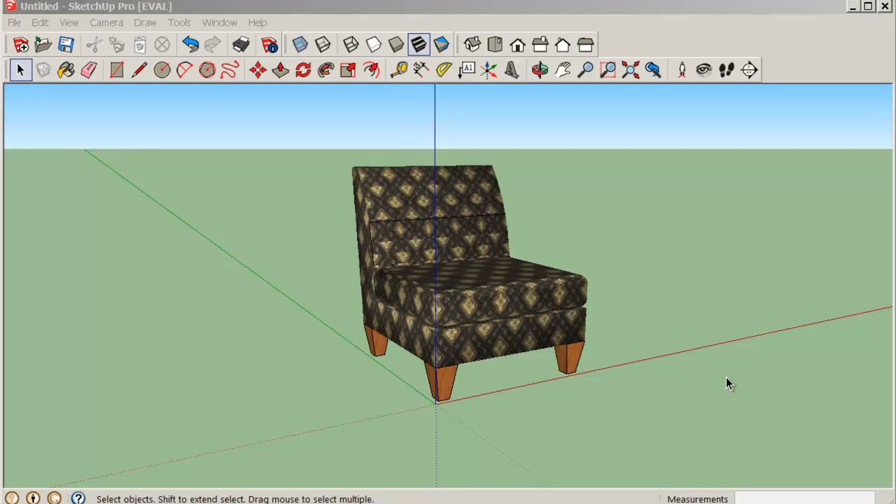So to start with, I'm just going to rotate this around a little bit so I can see what I'm doing. And if I go into my front view here, if I try to create a rectangle, it should create a rectangle on that front face.

So I'll just click in here and type in 4, 16. Okay, 16, 4. So sometimes it tries to guess what you're doing, and it lays things down wrong. But if you just retype it, everything goes okay. You don't have to undo it and redo it repeatedly.

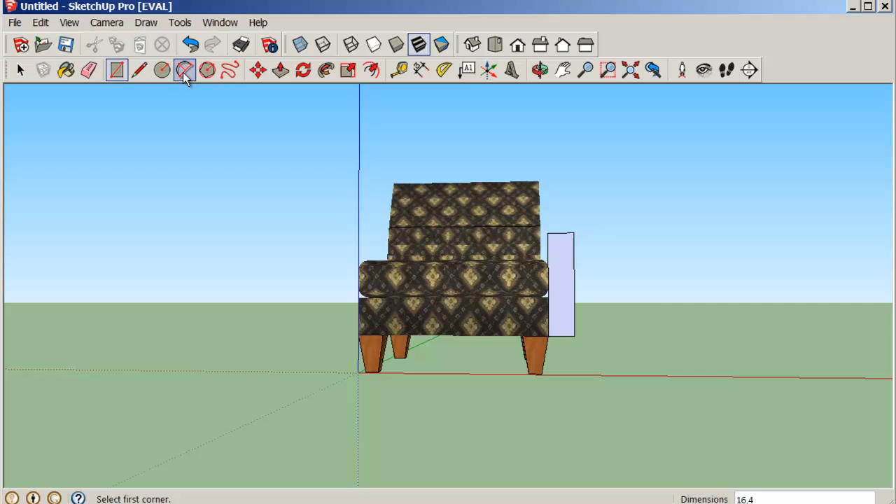Just retype it as long as you haven't done anything else. So the next step, I'm going to draw an arc. I click over here, click down here, and try to make that arc tangential in here, and that looks pretty close, good enough for us. I'm going to erase this and erase that, and now I have that shape.

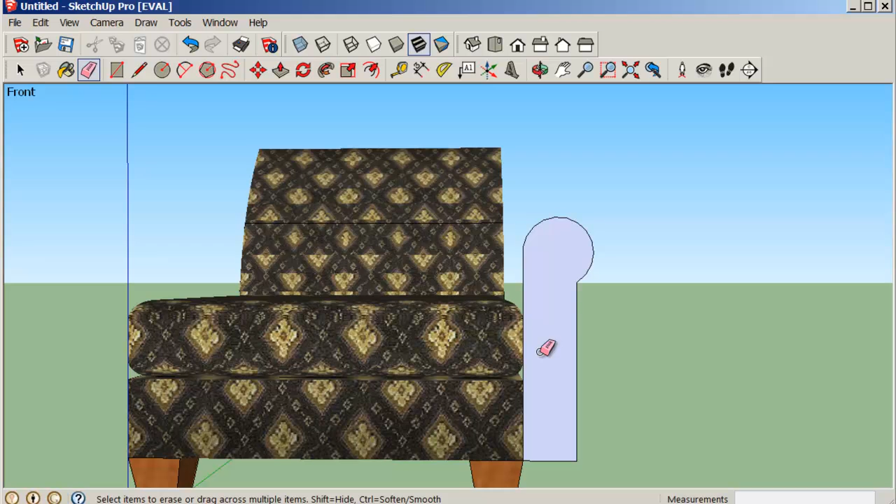Now if you want to do a different shape, I'm quite okay with that. Any design that you would like to work with, I'm really happy to see something different than what I'm doing here. I'm just giving some direction for people that maybe don't have any preferences, but if you have a preference, please try to do that.

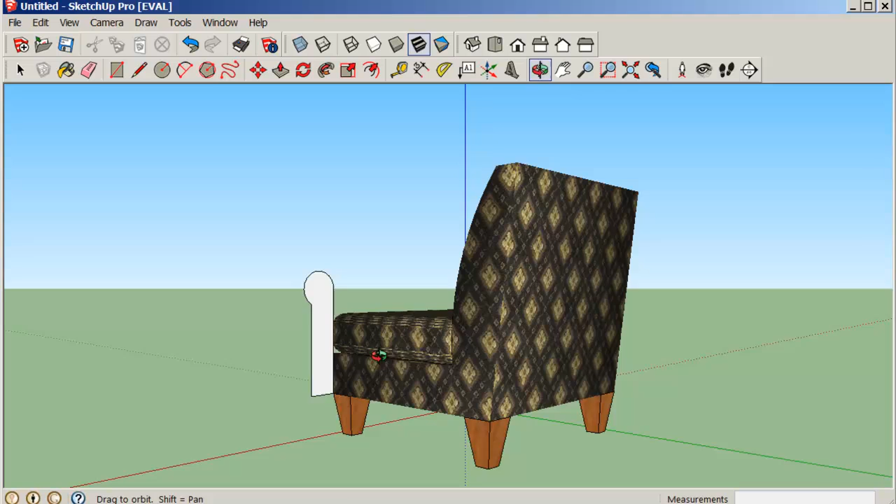So with this now, I'm going to just pull this, and if I can get over to just the end of it, that close is good enough. We're not too concerned.

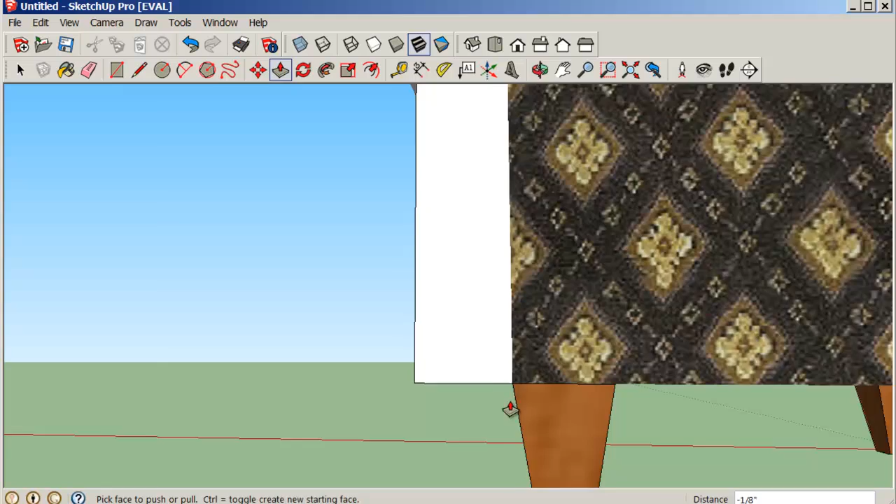Once we've got that close, I think that's a little bit too much. I can push it in and maybe grab this edge here. Now it's exactly at that edge. That helps because if I go to copy it and rotate it, it'll be exactly the same fit on the other side, and it won't be forward or back a little bit.

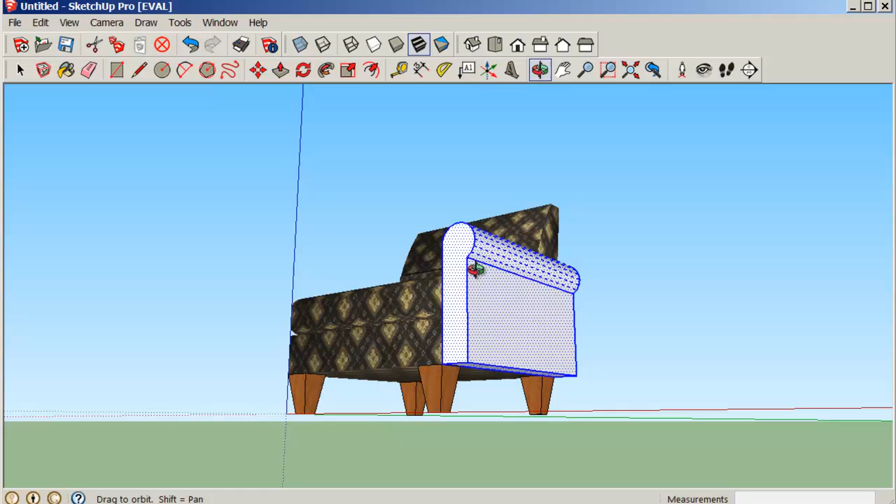So now I have this, so I want to make this into a group. I just select it, just this part here, or I can go 1, 2, 3 - that just selects it as well. Right click and then make group.

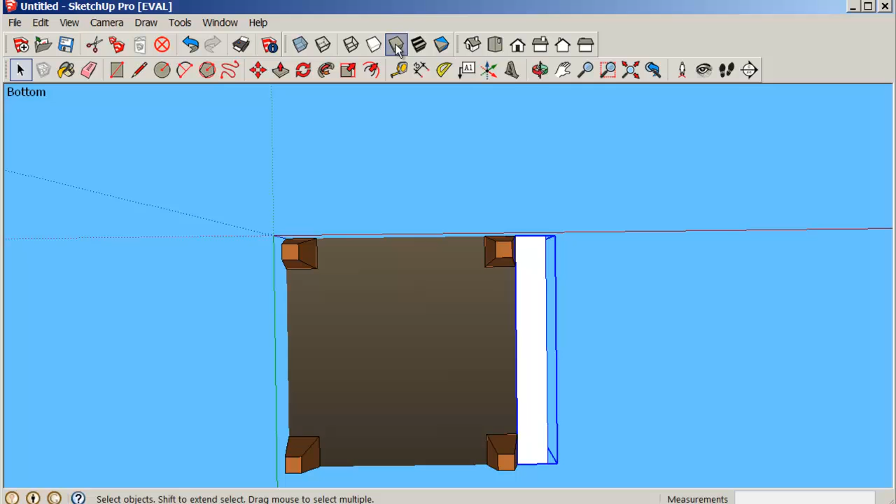So I can go to the bottom now, and if I want to do this accurately, I'm going to just change my shading from texture to monochrome, or even just a wireframe like this.

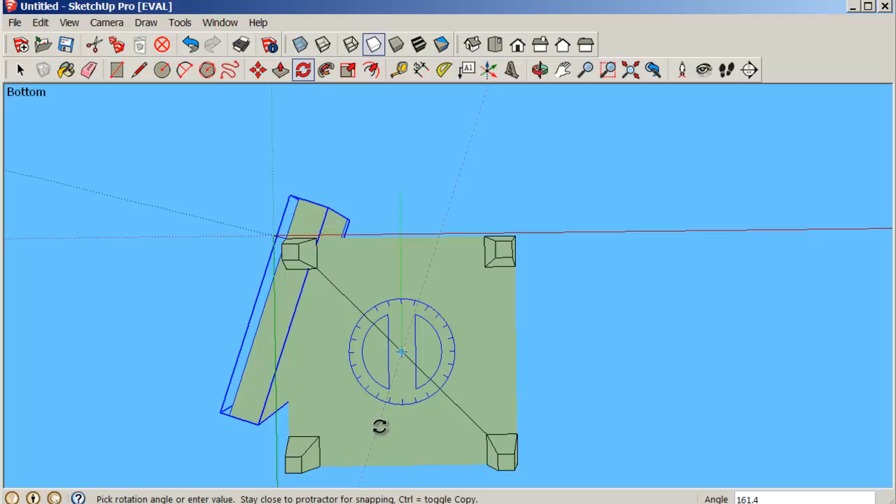Then I can draw a line from here to here. I can see the line. So now I can select the arm, select rotate, pick the midpoint, just click up on the top and run around and click here and type 180 degrees, enter, and then you know you've got that exactly.

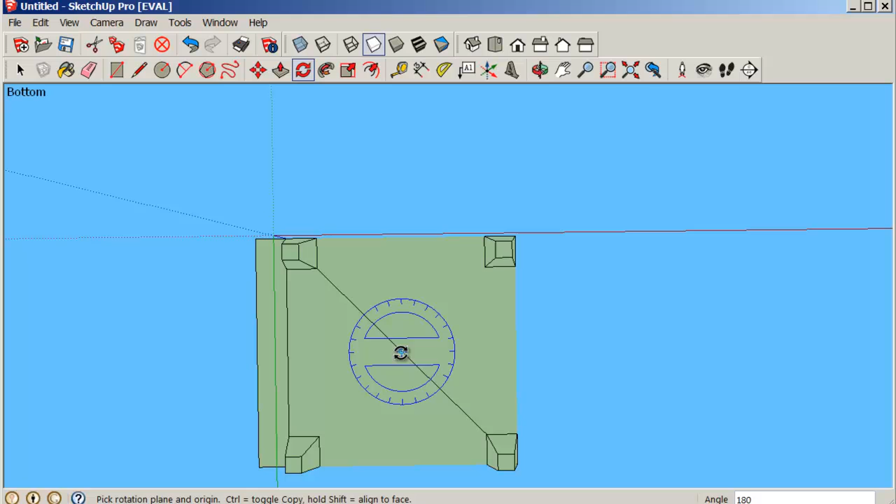Now I forgot to copy it, so it's okay because I can do it again. Sometimes it's good to do it twice so you can see it once and then try to do it with me. So this time again, we click on the midpoint here, then control for copy. You notice I have a plus sign there. Click up on top, run all the way down, pick here, and now we have that.

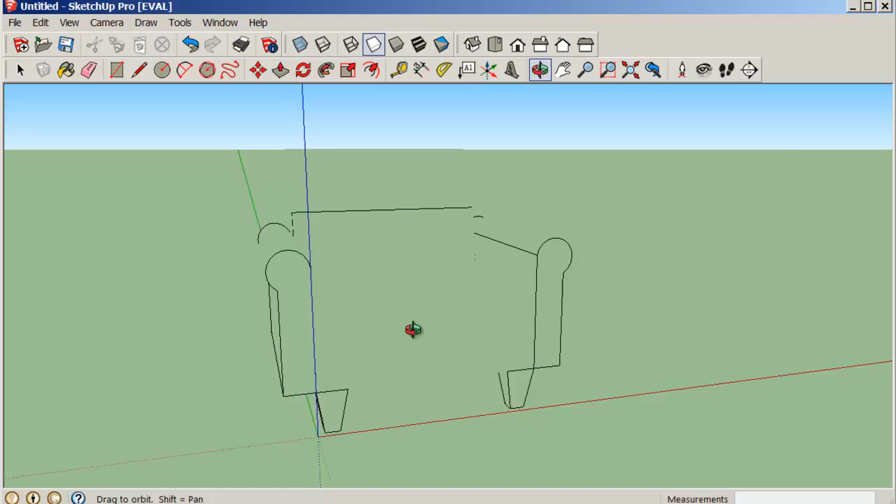So I'll just select this line and hit delete, and now I can orbit around to here, and I will change my material back to textures. And now I'm ready basically to click on this, right click, soften.

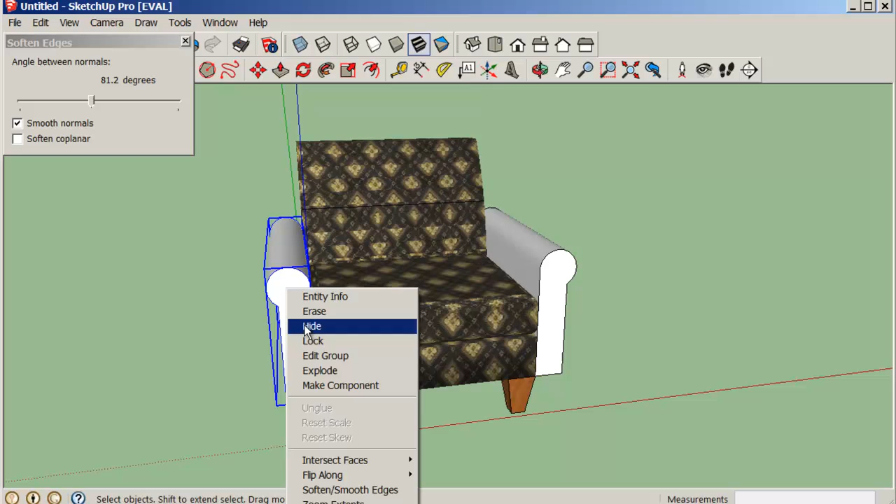Select the other one, right click, soften, just to get rid of that one line. So now I can add my material. Click on the eyedropper, select here, click, click.

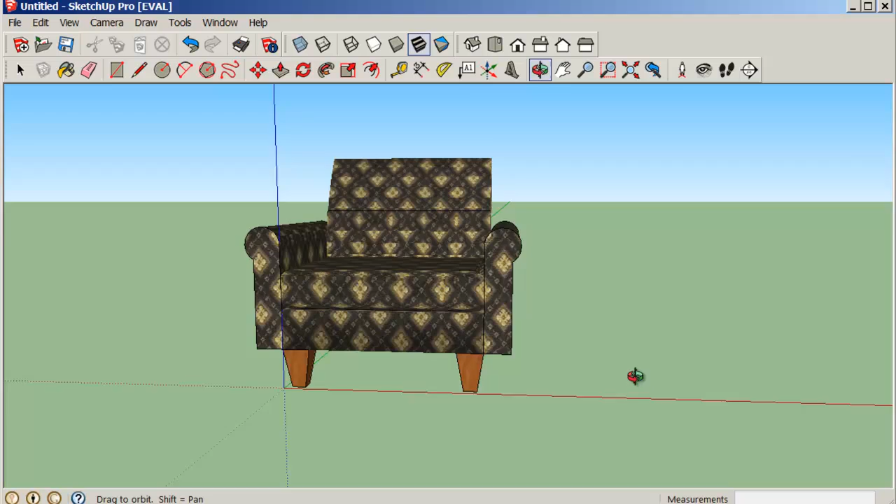So this completes the construction of the armchair. So now if I just copy components, I can make my sofa.

So with the select tool, if I click from here, going right to left, it selects all my objects on this side. So I click on move, control for copy, pull that over there. That's good. Then again select.

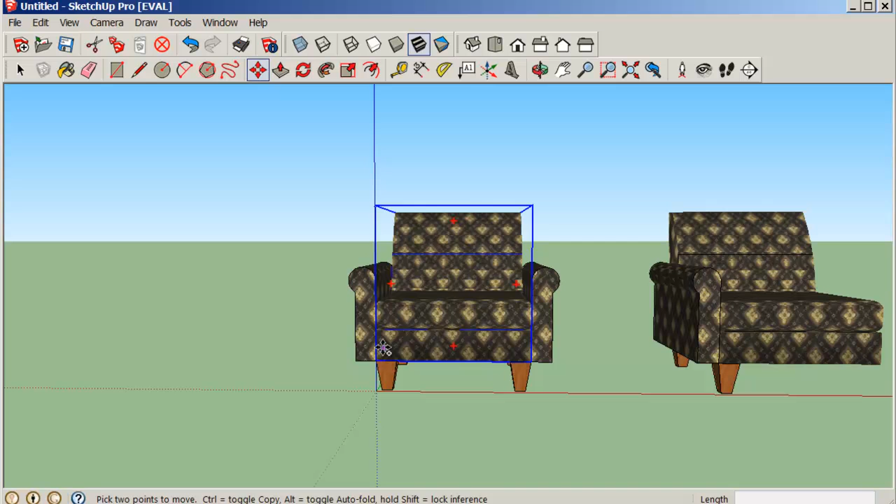Clicking just this part, just the chair itself. Move, copy. And now I'll just do the right side. Move, copy.

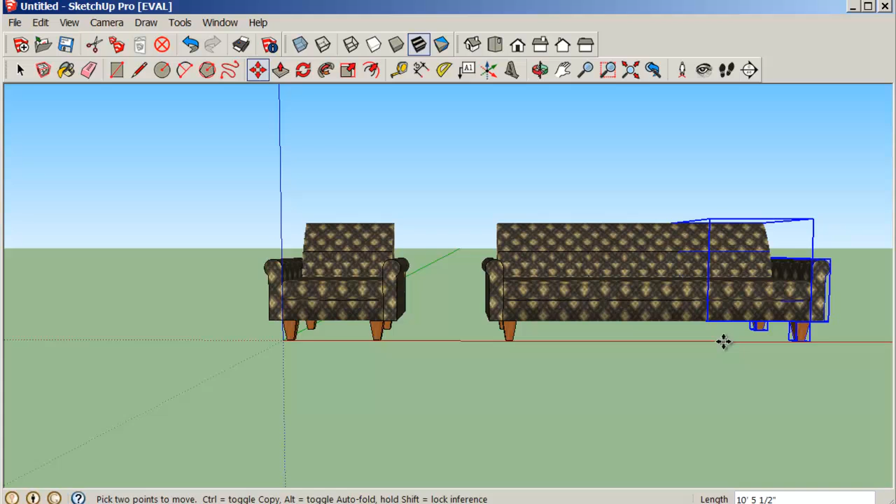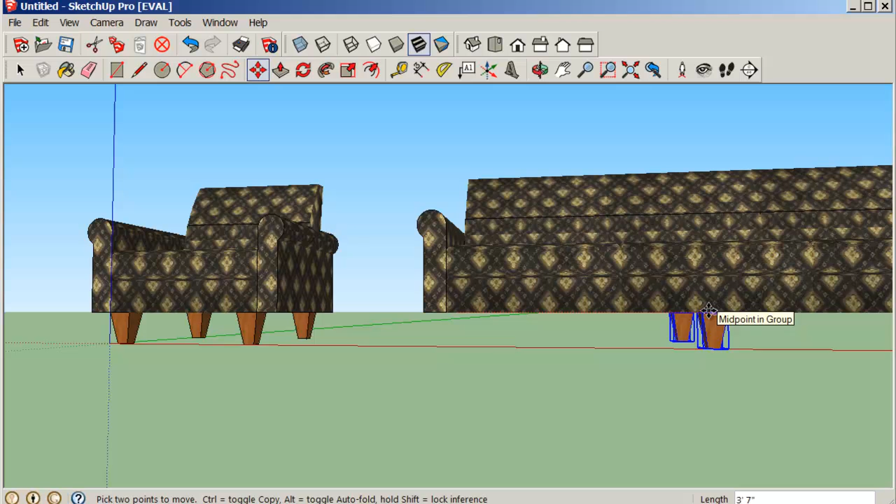Now, probably should have another set of legs in here. Just copy these. Move from the midpoint to the copy, of course, to the midpoint.

And now I've completed the sofa.

So all I have to do is make them into components and we're complete. Right click, make unique. CAR-arm chair.

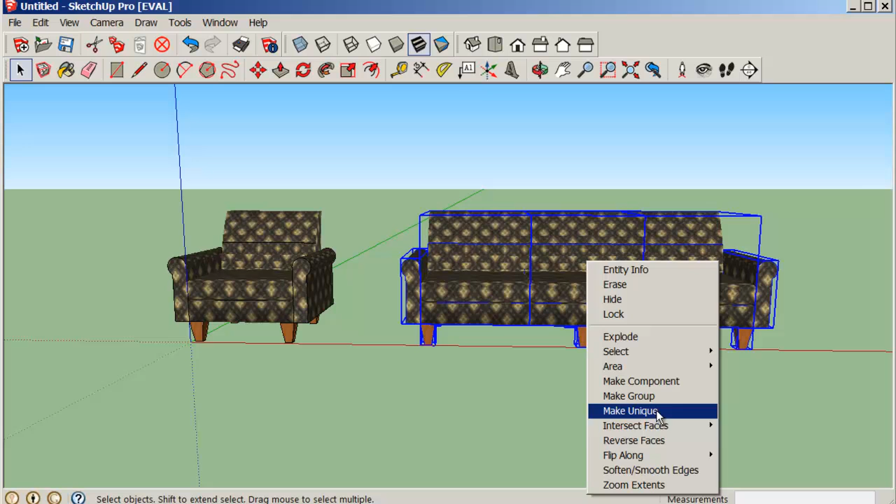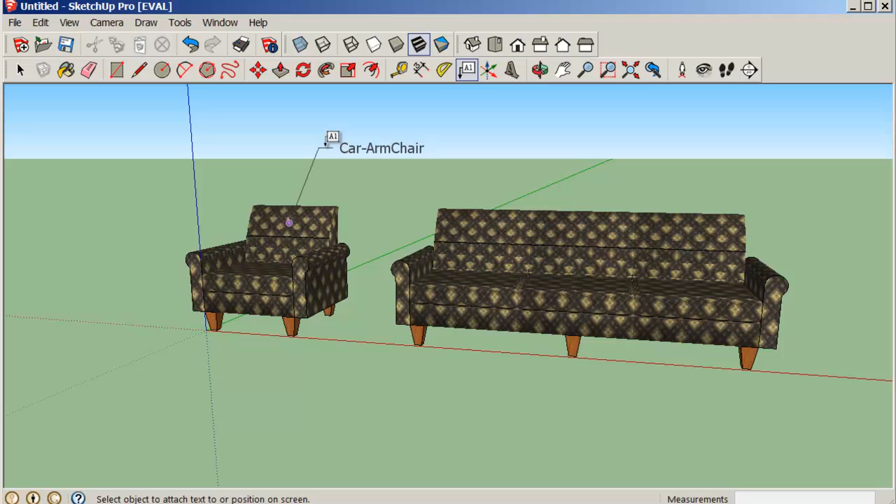Right click, make unique. Great. So there we are. Now if I want to label them, click on the text tool. And there it is complete.

I hope everything works out just as well for you as it has for me.

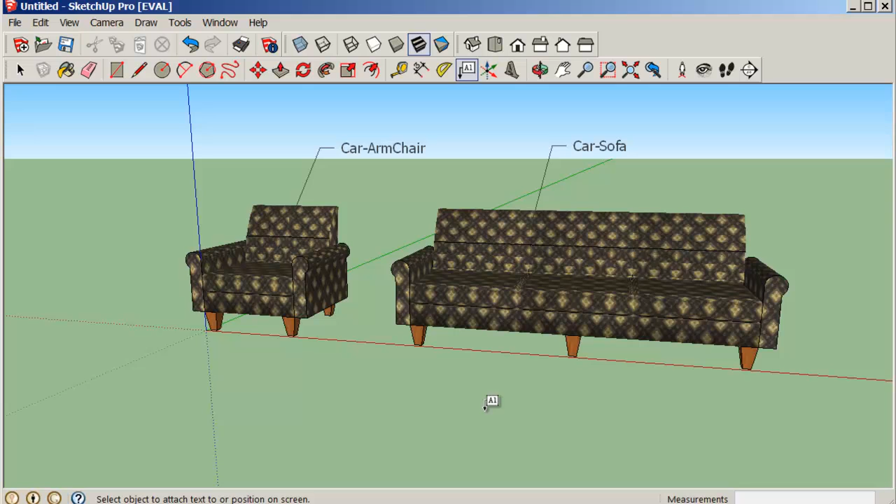So now I'd like you to design your own coffee table, whatever you like to do. If you want to put a glass tabletop on it, that would be nice. It's your preference, whatever you like, just whatever you like to create.